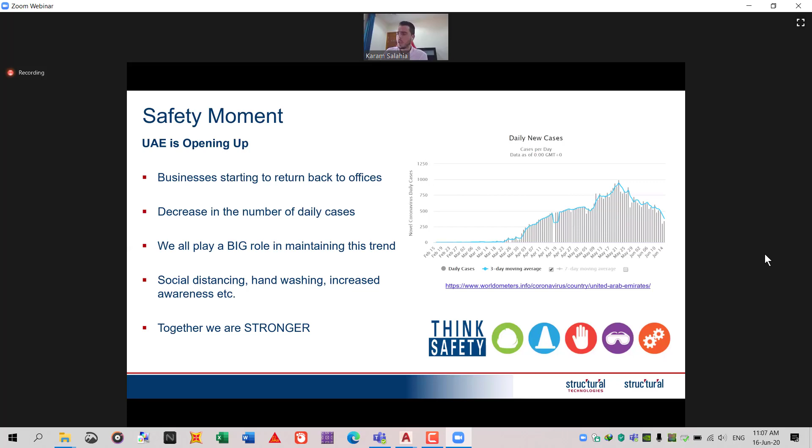So these are just a couple of points that we need to always be careful of when going back to work. Now, a quick introduction about today's speaker: today we have Mr. Bill.

Bill Hutton is a manager for Structural Technologies and a corrosion solutions team leader based in Dubai, in charge of the United Arab Emirates. Bill leads the durability-related repair works for reinforced concrete structures, including structural concrete repairs, post-tensioning repairs, water intrusion and moisture mitigation strategies, corrosion protection, and cathodic protection. As a solution builder for Structural Technologies, Bill delivers technology-driven turnkey solutions on an investigate, design, build basis to repair, restore, and extend the service life of structures. He is an active member of the Institute of Corrosion and the National Association of Corrosion Engineers, a certified cathodic protection specialist and technologist, and senior corrosion technologist, with 12 years of Middle East experience protecting and repairing concrete structures.

Bill, this is all yours, man. Thanks, Karam. Good morning, everyone, thank you for being here with us today, I appreciate everyone's time. I wanted to start off with a quick introduction for those of you who may not be familiar with Structural Technologies.

Structural Technologies is a US company. We've been around for almost 50 years, and we've been in the Middle East for about 12 years. Our annual revenue is more than $600 million US dollars per year, repairing, strengthening, and protecting existing reinforced concrete structures, which positions us as one of the largest specialist repair contractors in the world.

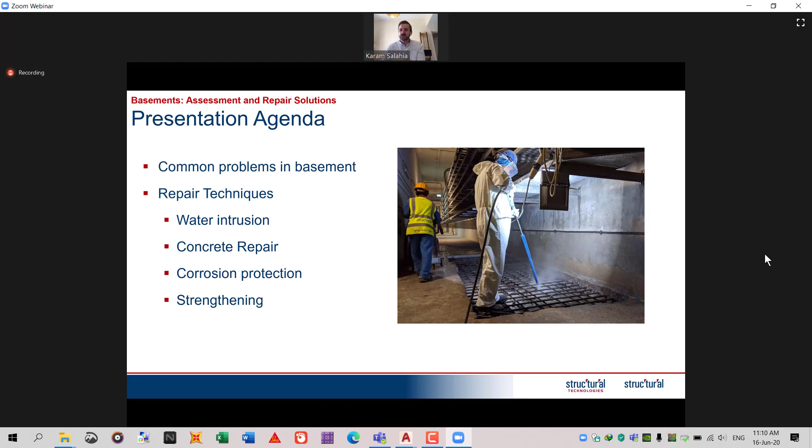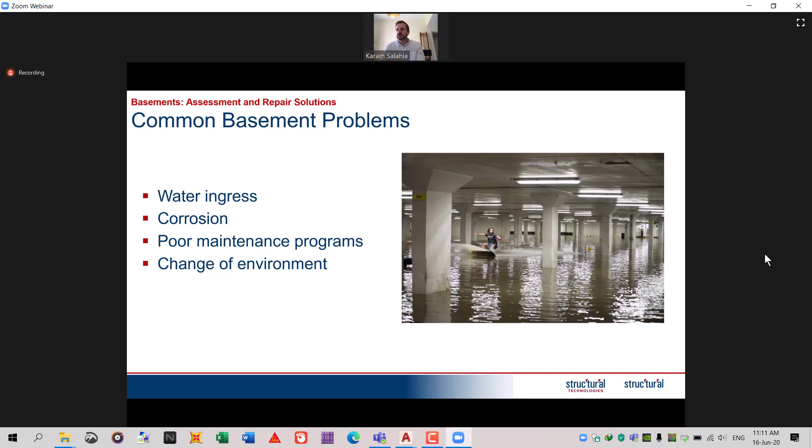So we start with common problems with basements. In my opinion, really, most of the problems we see with basements fall into these categories. They're either related to ingress of groundwater, related to corrosion of steel reinforcement, related to maybe poor implementation of maintenance programs, or related to some kind of change in environment or change in exposure condition.

So we're going to start by going into control of groundwater. I thought I'd just start off with some photographs so that everyone is familiar with what we're talking about. So, unfortunately, most of the basements here do actually leak. Water can come in through MEP openings, through cracks or construction joints, or through expansion joints.

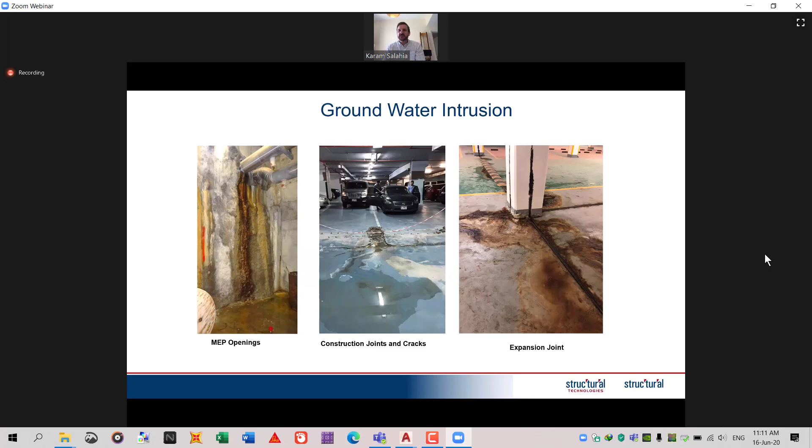Interesting fact is that concrete above 24 MPa is actually watertight. But that's except at the joints, the cracks, and the honeycombs. So it's generally at the defects. Wherever you have a defect or a concrete interface, a construction joint, that's where the water can come through.

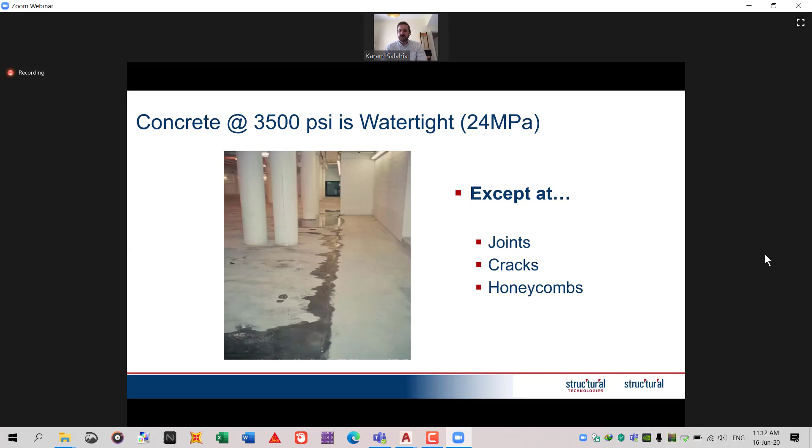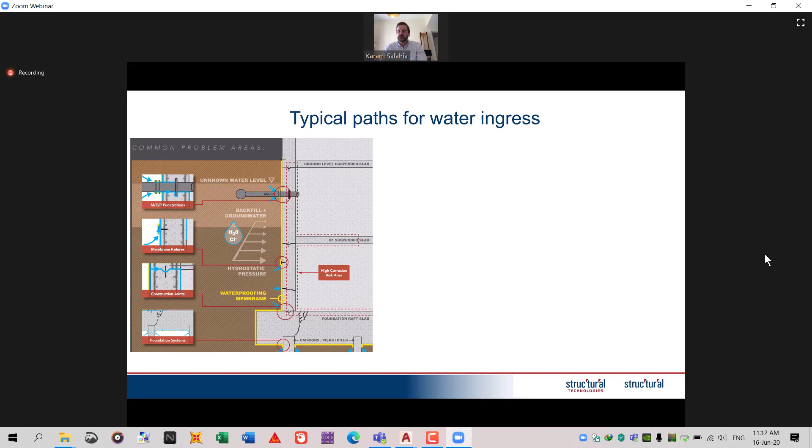So most buried structures, including basements, are constructed with a waterproofing membrane system. This could be a bonded or unbonded system, and the design intent of this system is to prevent water from coming into a building. However, in our experience, more than 70% of these membranes seem to fail in some way or another.

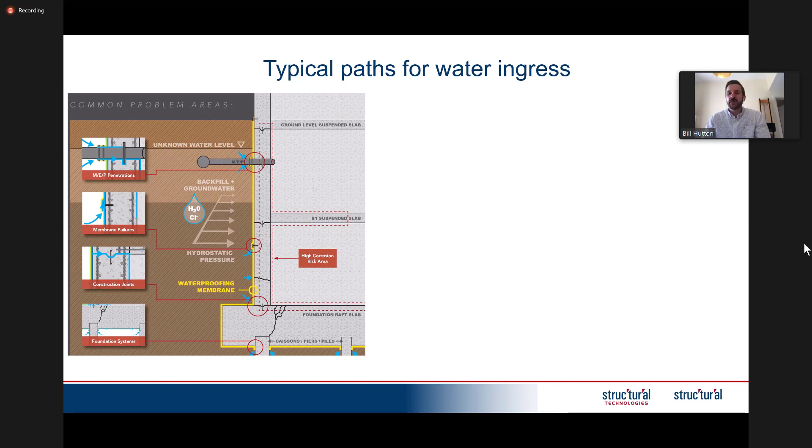And then once the membrane has failed, water is like electricity, and it will just take the path of least resistance into a building. So the pathways could be left-in-place form ties, could be construction joints, could be MEP openings, could be cracks, or could be porous avenues if you have poor quality concrete or honeycomb.

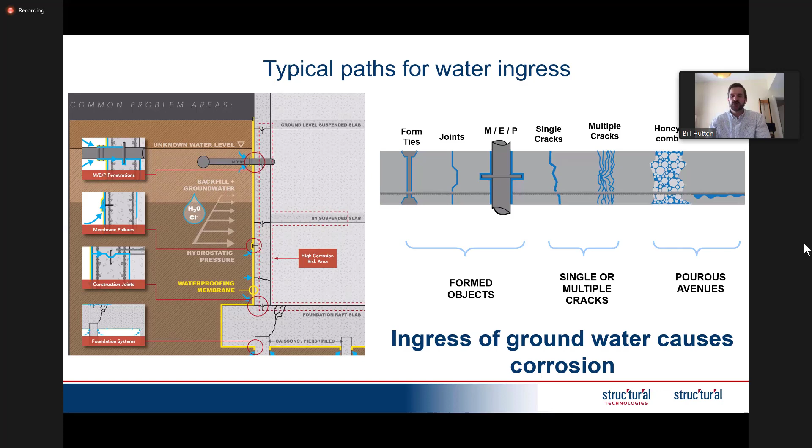As Morty discussed in detail yesterday, groundwater coming into a building is one problem, but really the bigger picture is that this groundwater contains salt, which causes the steel to corrode. I'm not going to go detailed into the mechanisms because that was discussed yesterday, but once the chlorides get into the concrete, they cause the steel to corrode.

Corrosion product is very expansive, so it means it can occupy 10 times more space than the steel. It grows on the steel, puts pressure on the cover, and can damage the concrete, which can end up resulting in a loss of strength for the structure.

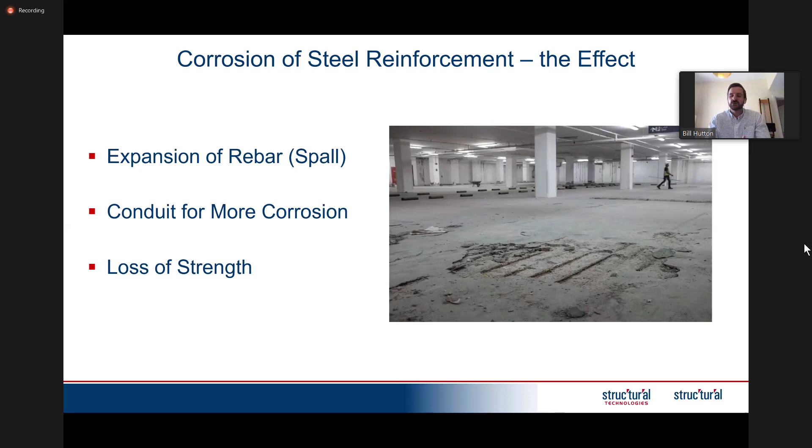So examples of groundwater control solutions include interior coatings, or coatings in general. Generally, if you're talking about basements, the water's coming in from outside. So if you install a protective coating on the inside, which would be the negative side, it's probably not going to be an effective means of water control. However, if you have, for example, a water tank in a basement where the water is inside the tank, if you put a coating on inside the tank where it's on the positive side, then it can be a good method of controlling or making a structure watertight.

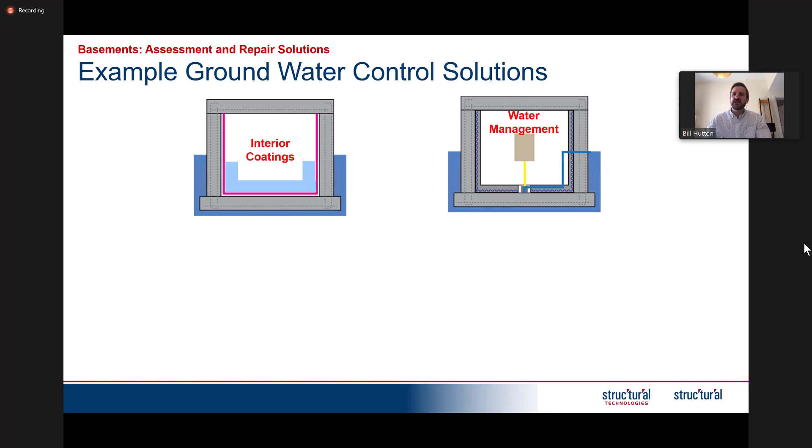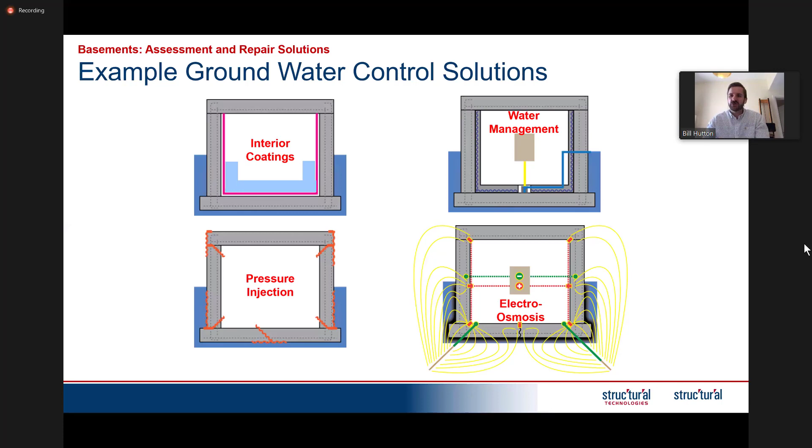We also have water management systems, where water is allowed to come into a structure, but it's collected, managed, and routed to a sump, then pumped out of the structure. We have pressure injection, which is extensively used as a means of groundwater control. And then we have something called electroosmotic pulse, a technology which uses electroosmosis, the movement of water in the direction of negative charge.

So we'll start off by having a brief discussion on pressure injection. We're going to talk about two basic concepts today, or means of doing pressure injection. The first would be what we call backside or curtain grouting. So what we're doing here is we're actually drilling completely through, or almost completely through the member. If it's a wall, we're drilling almost to the back of the wall until we leave about 10 millimeters of concrete. We would then put a steel bar or steel rod down into that hole.

We would tap it, we would fracture the concrete, and you would actually pump injection material.

You pump injection material behind the structure. So the first area that you might try to inject this material is between the cavity, between the back wall and the existing waterproofing membrane. This is really the closest you get to ever trying to reinstate the waterproofing membrane.

However, sometimes also in this method, when we're doing curtain grouting, if there's extensive rupture in the membrane, or if there's no membrane present, then actually we're not trying to inject in the space or cavity between the membrane and the structure. We're actually just doing grouting into the soil, creating a cloud in the soil behind the wall, behind the construction joint, or under the slab. You can see a photograph of this in action below.

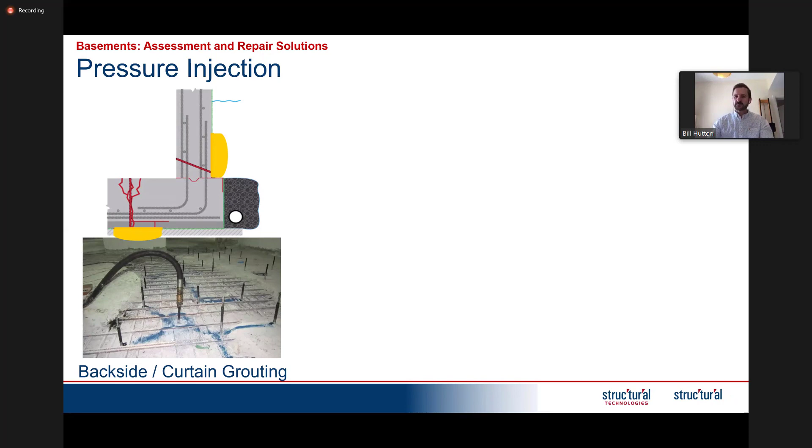Another common method of pressure injection or chemical grouting is something called interception grouting. This is where, if you take one of the most common areas where a basement would leak, it's the construction joint between the slab and the vertical member - that's a better example, so we call that the kicker joint. That's a really common place where water can come through. What we do is we drill in at a 45 degree angle to try and intercept the midpoint of the joint, and then we would inject the material inside to completely seal the joint.

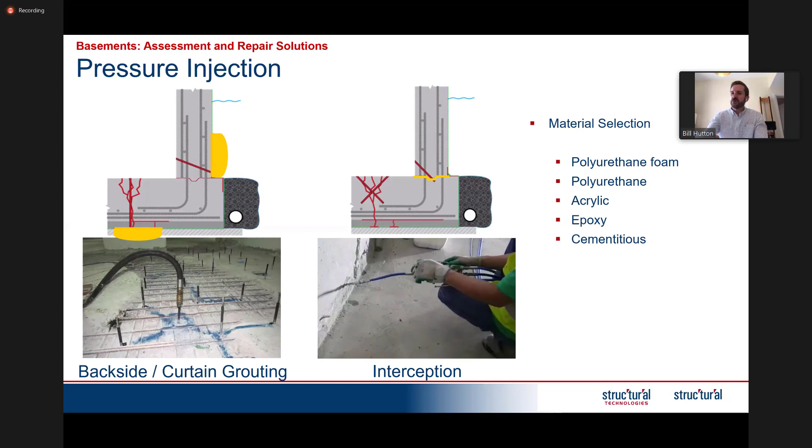Now, there's lots of different materials which can be used for pressure injection. What it's really important to do is ensure that you select the correct material for your application. So I've just listed out some typical materials which could be used: it could be a polyurethane foam, polyurethane, acrylic, or epoxy, or cementitious.

But really, it's important to select this material based on the exposure conditions - whether you have a wet or dry exposure, and what is the root cause. For example, if the crack is due to movement in the wall and you inject a rigid material, for example an epoxy, then you're preventing that movement which is required, so you would probably induce another crack next to the one that you just sealed. So in most cases, if you have through and through cracks in walls, you would be injecting an elastomeric sealant which has some kind of flexibility.

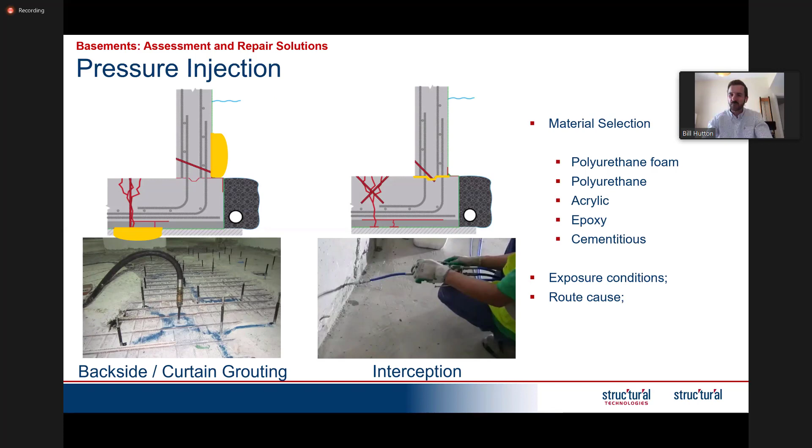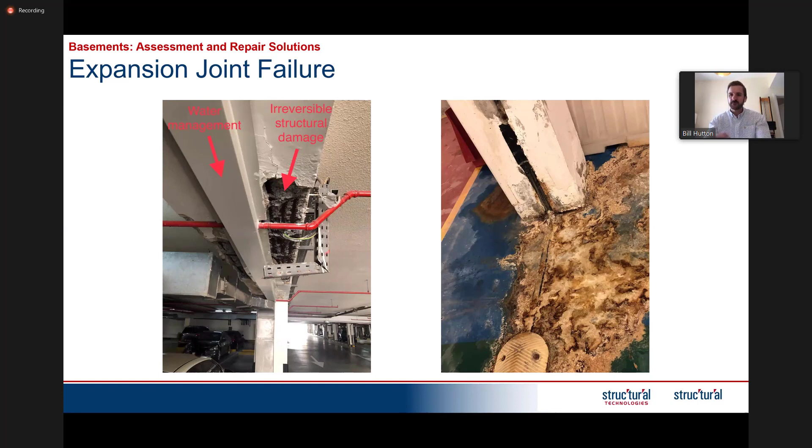So in terms of repair solutions for expansion joints, it's really important to make sure all of the effort needs to be done up front in terms of engineering.

In terms of engineering, we look at different exposure conditions. Is it a wet exposure or dry exposure? If it's exposed to groundwater, then retrofitting or repairing a leaking expansion joint becomes infinitely more complex, and especially the further down you go, the groundwater or hydrostatic pressure increases, so it becomes more complicated.

You need to look at what traffic will be going over the joint. Will it be foot traffic? Is it car? Is it heavy vehicles? And of course, design life and warranty also play a big part, as well as access.

By access, we mean, for example, if you take the previous example where you have the ground floor slab and the landscaping above, you have two options: repair it from the bottom or repair it from the top. The best way would be to repair it at the source, meaning you remove all the landscaping, remove the tiles, and get back down to the joint and repair it from the top. If for some reason that's not possible and you have to repair it from the bottom, it's certainly possible, but it could end up being more complicated, and you may face some challenges along the way.

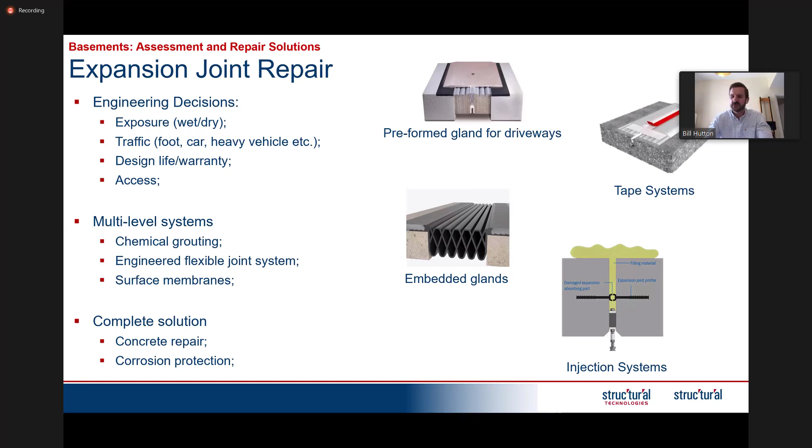So, water management. The idea is that water is actually allowed to come into a structure, it's collected and routed to either a drain, or to a sump where it could then be pumped out. So you're allowing water to come into a structure, but you're managing it.

Now, the risk in this region is that the groundwater, as we discussed yesterday, has an extremely high salt content. So wherever you are allowing this water to come in, if it's in contact with the concrete, it could lead to a durability related problem. You should carefully consider whether water management is required or not, and if it is required and you're looking for a long-term solution, you may need to include some corrosion control as well, such as cathodic protection.

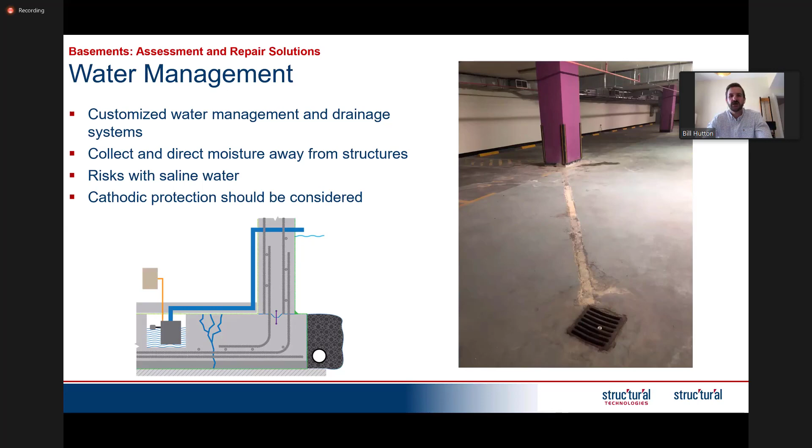Now we'll go on to concrete repair. So what are we talking about? This is basically where the steel has started to corrode, rust forms on the steel, it's expansive, and causes the concrete to spall and pop off. So it could be repair of spalling concrete on a wall, repair of a cracked beam, or repair of a concrete slab.

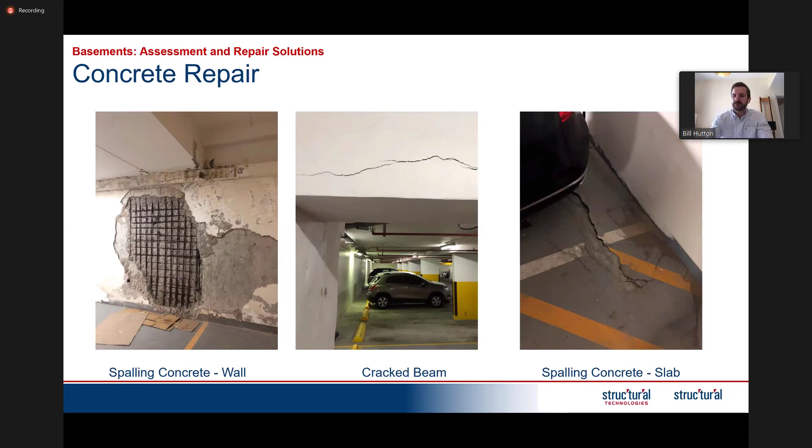I was thinking, from an owner's perspective, what would be my objectives for a concrete repair? These are five points I decided would be important. First is ensuring the safety of the structure, along with ensuring the safety of the traveling public.

A lot of these basements are used by people who park their cars, so there's vehicular traffic and foot traffic. After people have parked their cars, or while walking from lift lobbies to their car, there's a risk that concrete could fall down and injure someone.

Also, we're looking to prevent further deterioration. This references the law of fives, which Morty discussed in yesterday's webinar: durability problems don't increase linearly, they increase exponentially in cost and complexity. So if your structure requires repair and you delay those repairs, there's an exponential increase in cost and complexity.

All owners want durable repairs and want to ensure they get the best value. For every single dirham you invest in repairing your building, you want to make sure that dirham is well spent. One of the objectives is to prevent a requirement to repair the repair.

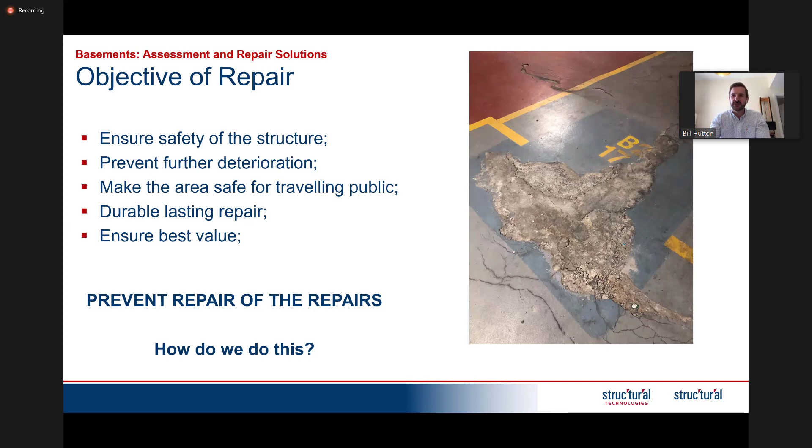First would be determining a suitable repair geometry. If you have delaminations as shown on the left, and you actually sound those out with a hammer and follow the exact geometry of the delaminations, you may end up with a fairly complex shape like we see in the middle.

The challenge is that if you repair in that complex shape, you have a lot of re-entrant corners, and there's probably a slightly different thermal coefficient of expansion between the repair material and the native concrete. If they're expanding and contracting at slightly different rates, a complex shape makes you more likely to have cracks in your repair. Wherever you have cracks, the steel is exposed and your repair may fail. So it's better to go for a simple geometry with as little corners as possible.

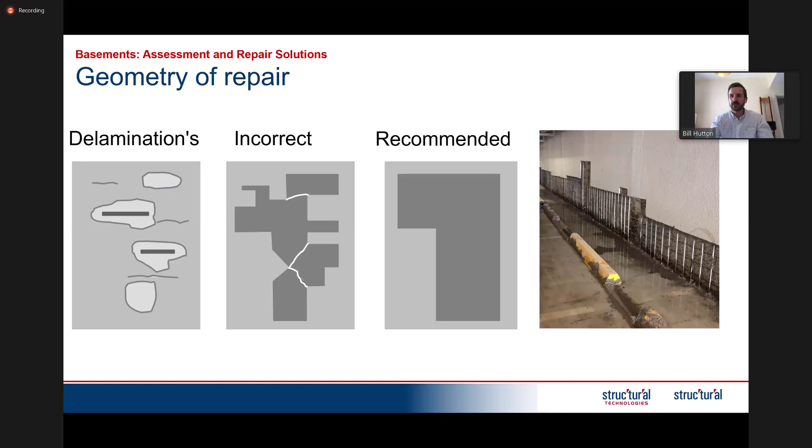Something else extremely important is to make sure that when you're removing or excavating the concrete, you don't only remove the concrete which is delaminated or spoiled, but extend that chipping until you reach a length of clean steel.

The reason is that if you only remove the loose concrete and leave steel in place which already has corrosion product on it - meaning the concrete's already contaminated - then around the outside of that repair, you're definitely going to see a premature failure.

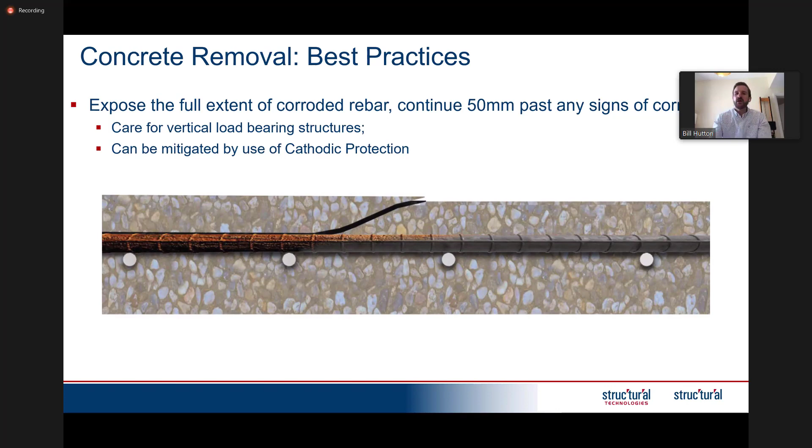Other basic steps required for concrete repair: make sure you remove or excavate concrete behind the steel. Typically 25 millimeters below the steel should be chipped out. Another simple way to put it is a gloved hand test.

If you have your correct personal protective equipment on, with a glove, you should be able to put your hand underneath the steel. The reason for that is two things: one, you make sure you remove all of the contaminated concrete around the steel - this steel is probably corroded because it's contaminated by carbonation or by chloride, so it's important to remove all that contamination.

It also enables you to remove any of the non-tightly bonded rust. This non-tightly bonded rust is typically removed by some means of abrasive blasting. Once the rust is removed, you can then take a caliper.

You can measure the cross-section loss. Typically, the rule of thumb is if you have cross-section loss of between 10 to 20%, then you should engage a design professional, an engineer, and they will determine how much supplementary steel needs to be added.

The reason we say supplementary steel is because it's very rare that you would actually remove steel from a structure—you always just add additional steel. Whenever you're adding additional steel, it's important to get sufficient development length, which is the overlap between the new bar and the old bar. If there's not sufficient development length, you may need to drill in an epoxy anchor or some dowels to provide that development length.

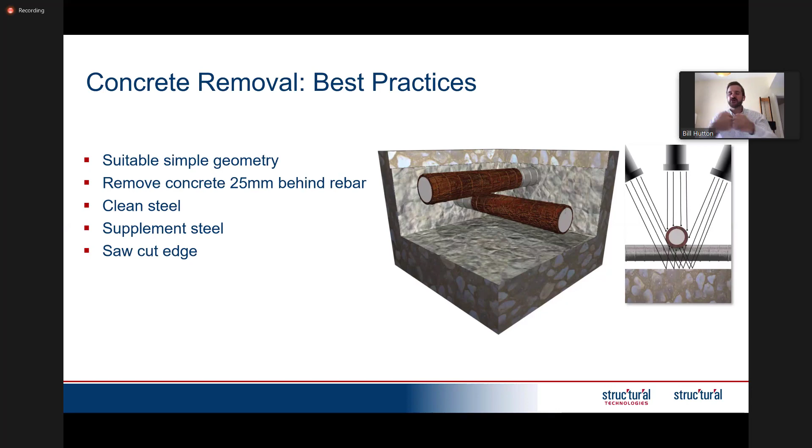In terms of surface profile, what we're looking for in a concrete repair is monolithic composite action. To get that, we need to make sure we have a roughened surface on the native concrete, so we would chip and provide typically a 6 to 8 millimeter amplitude. We also want to provide an open pore substrate.

As we said before, concrete is like a sponge—it has all these pores. We need to make sure those pores are open so that when the repair material comes in, it's accepted by the native concrete. Sometimes you also need to have vertical or horizontal dowels, if it's for a wall, to enable sufficient shear transfer.

QA/QC always plays a key part in all repairs, occurring along every step of the way. At the end of the repair, once it's finished, often a test which is done is called a pull-off test, where you're checking the bond strength between the repair material and the native concrete.

Here you would core down through the repair into the existing structure, then epoxy anchor a dolly on top, and pull that off. You want to check that the strength required to break the concrete is higher than the strength required by your design—as a rule of thumb, typically maybe 1.4 MPa.

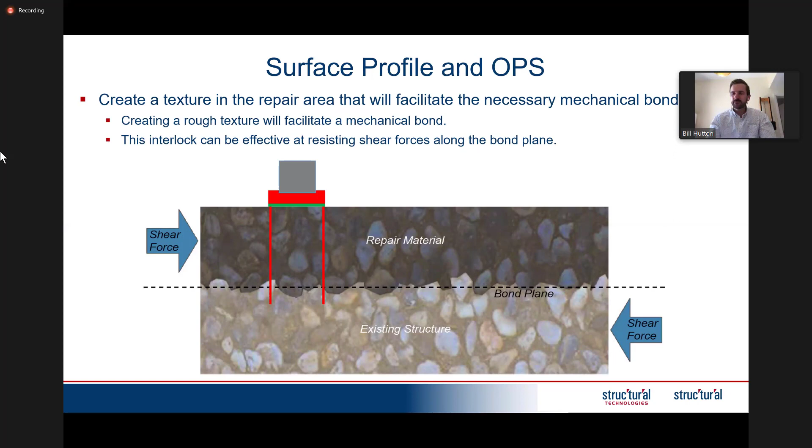It's also important to make sure you have correct means and methods for concrete placement. There are lots of different ways concrete can be placed, with advantages and disadvantages of each method. Some methods are, for example, dry hand pack, which is really only good for shallow or cosmetic repairs. If you have any steel exposed, it's very difficult to get correct compaction behind that steel.

If you have large overhead repairs or you're enlarging a member, then probably you need to use a technology such as form and pump, where the concrete is pumped in under pressure. It's all about QA/QC and making sure that whatever means and methods are being used to repair your structures are correct and selected based on the specific requirements of your structure.

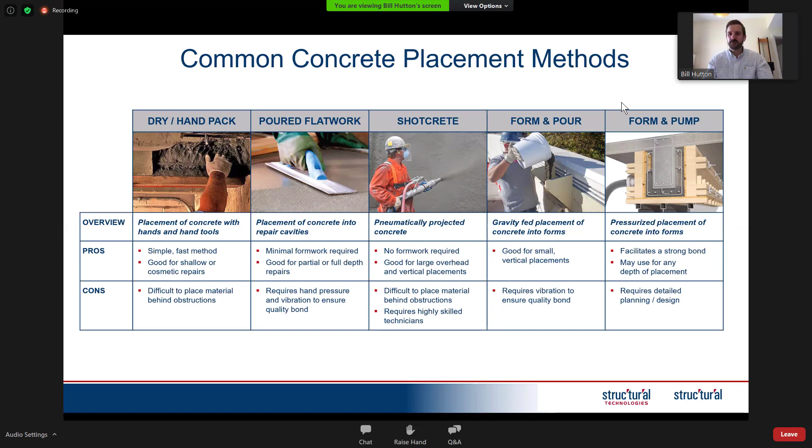Someone said this the other day, that there are three things in life which are guaranteed: the first is death, the second is taxes, and the third is that concrete will crack.

Unfortunately, yes, concrete will crack. If your concrete has cracked, then where that steel is passing through the crack, there is no protection. If the cracks are not repaired properly, what starts as a crack can quickly lead into a durability problem, which can then lead into even a structural failure of a particular part of a structure.

One very simple way of repairing cracks is what we call rout and seal. This is where you simply rout out the crack and seal it, which provides a barrier preventing water, chlorides, and carbon dioxide from carbonation getting to the steel.

It probably can't be used if you have a structural crack—in that case you need to do a proper structural repair. But a lot of these cracks are due to thermal expansion and contraction, so this method enables that movement to be there.

I would definitely advise owners that if you have cracks in your structure, you should get them assessed. A lot of the time you can get cracks repaired for a fairly nominal amount, but if you leave them unrepaired, it can lead to very expensive, complex, complicated repairs further down the line.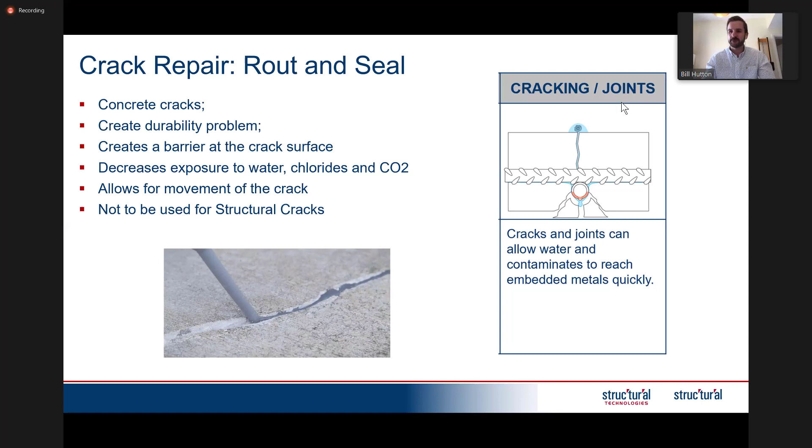We assume this concrete repair was required because the concrete became contaminated with chlorides or carbon dioxide, causing carbonation. So we removed all of the damaged concrete, cleaned the steel, added steel, cast it back, and did a pull-off test - everything's okay. This steel is now good for, say, 10 years. In the area you've repaired, you should face no problems.

However, the reason it corroded in the first place, the reason the concrete spalled, was because the steel corroded, and the reason the steel corroded is because the concrete was contaminated with either chlorides or carbonation. So if you leave those chlorides or carbonated concrete in place around the outside of the patch, you can end up with failure around the perimeter of the patch.

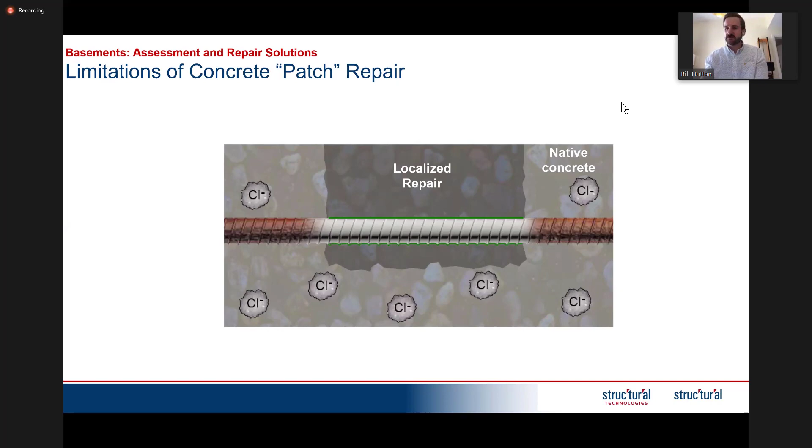So for some owners, due to access constraints or budget constraints, they can only do patch repairs. They understand that every 2 to 5 years they're going to have to come in and do these repairs, which means additional disruption, and it would increase the overall service life cost of your buildings.

So some owners want to explore durable long-term solutions. We work with a lot of owners to provide long-term corrosion control solutions. These are generally selected based on the service life required and whether there are any access constraints.

For example, if you have paid parking that's always full, it's sometimes very challenging to shut down the parking for a long period of time. Also, there are sometimes constructability or budget challenges.

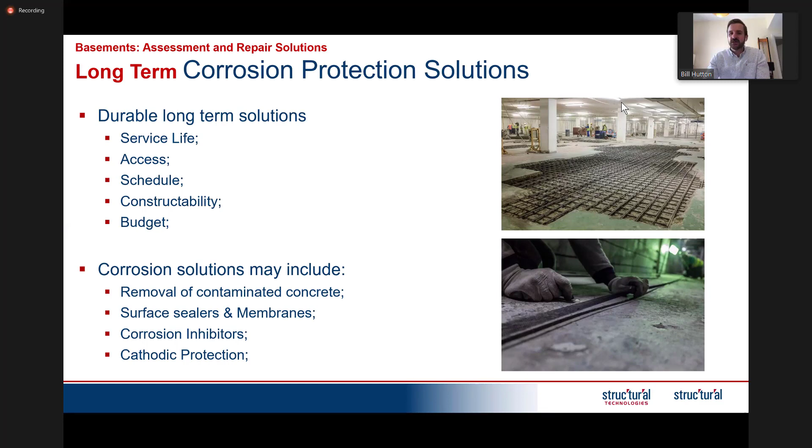So if you're looking for long-term solutions, they can include, for example, removal of contaminated concrete, surface sealers and membranes, or corrosion inhibitors or cathodic protection. We're going to go through a couple of these technologies now, or repair solutions.

First is removal and replacement of contaminated concrete. Yes, it's definitely a long-term solution. It normally involves fairly extensive investigation - you need to do lots of testing to determine which areas of your structure are contaminated and to what depth, and then you'd need to chip out all of that contaminated concrete and place it back with fresh concrete.

As you can imagine, it's a fairly intrusive repair, which can end up being fairly costly and take a lot of time.

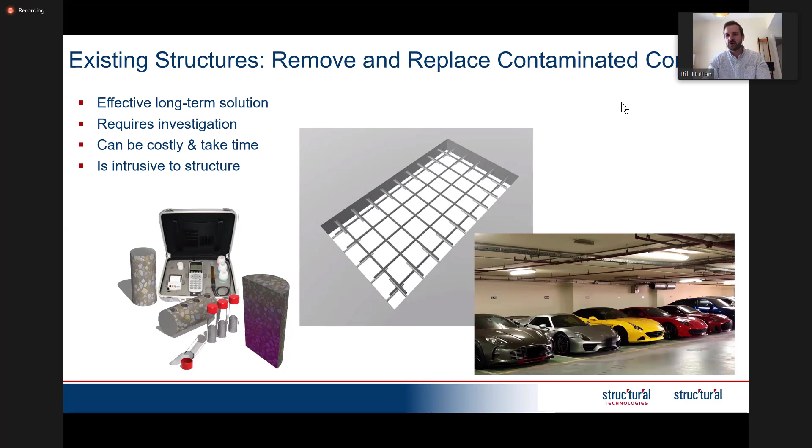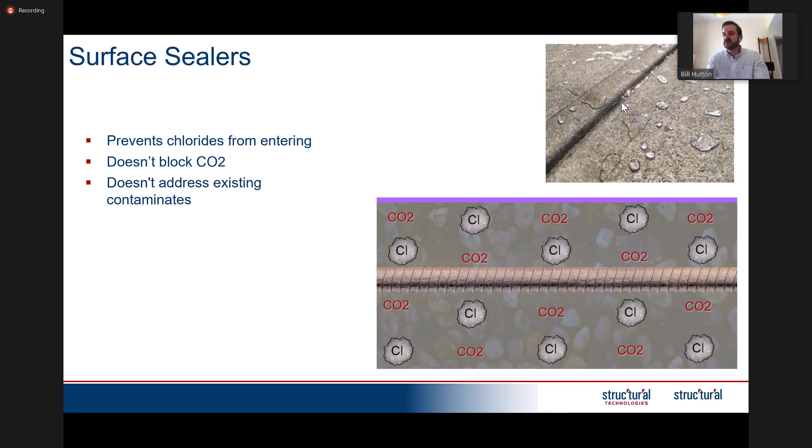Another solution could be surface sealers. Surface sealers will generally stop more chlorides from getting into the structure. They probably won't block oxygen or carbon dioxide, and they definitely don't address existing contaminants. This means the steel, if already contaminated, will definitely continue to corrode.

A better solution for corrosion control can be high-performance membranes. If you have a high-performance membrane on your structure, it can prevent chlorides and carbonation from getting in, and it can prevent water from getting in, but it doesn't address existing contaminants.

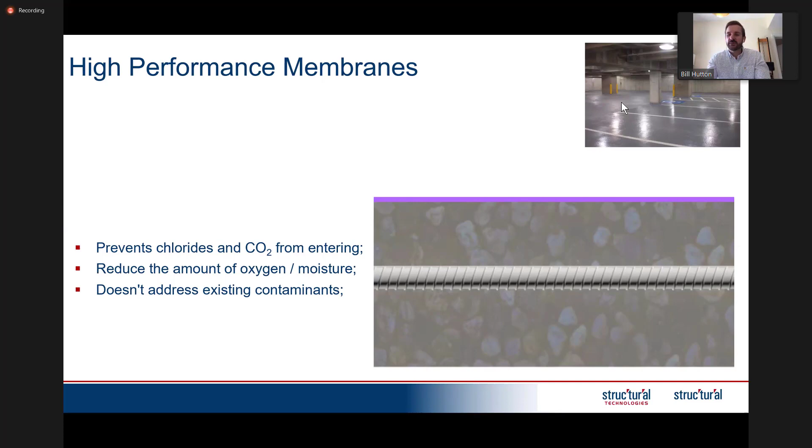This is where it's really important to maintain coating. A lot of the buildings we work on in Dubai are actually less than 10 years old, and we go into them and see the car park coatings have deteriorated. If you have a new structure, it's always good to maintain these protective coatings to prevent that contamination from occurring, because once contamination occurs, it's very challenging to address.

So even if you put a high-performance membrane on it, it can do two things. For an elevated slab, it will prevent oxygen from getting in, which slows down corrosion. If you have a slab on grade, the membrane will actually prevent moisture from evaporating, meaning the slab becomes more saturated, which again reduces the availability of oxygen and reduces the rate of corrosion.

So membranes can be used to extend things, to kick the can down the road, if you like. They can be used as short-term solutions to reduce corrosion, but not necessarily to mitigate corrosion.

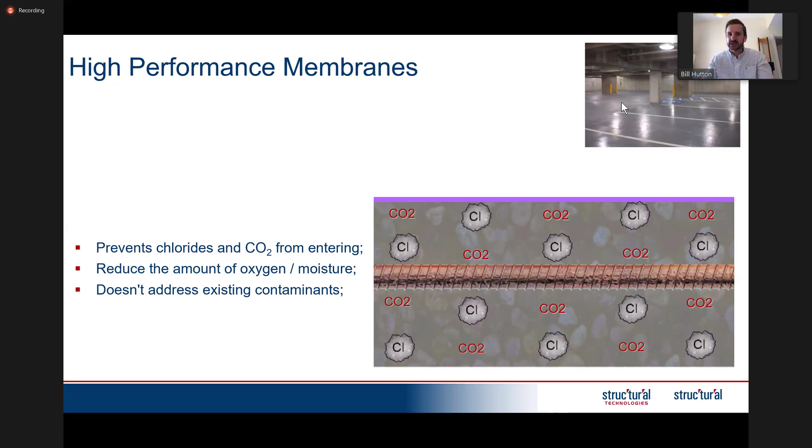So a technique which can be used to mitigate corrosion is something called cathodic protection. Cathodic protection is an electrochemical technique used for corrosion control. In simple terms, corrosion is the process of energy being released from the steel, and cathodic protection is a process of putting energy back into the steel.

There are two main types of cathodic protection systems. The first is a galvanic system. The main feature is that they do not require a constant source of power - they use the natural potential difference between the anode and the cathode. The anode may be zinc, the cathode is the steel we're trying to protect. We use that natural potential difference to provide the protective current. For an impressed current cathodic protection system, we require an external power supply.

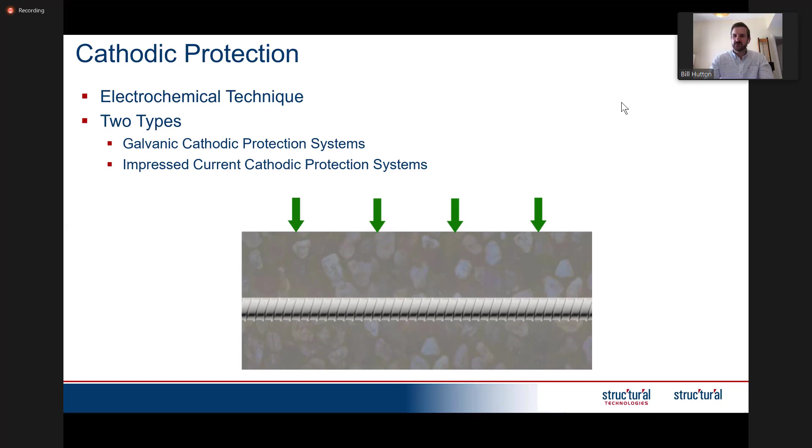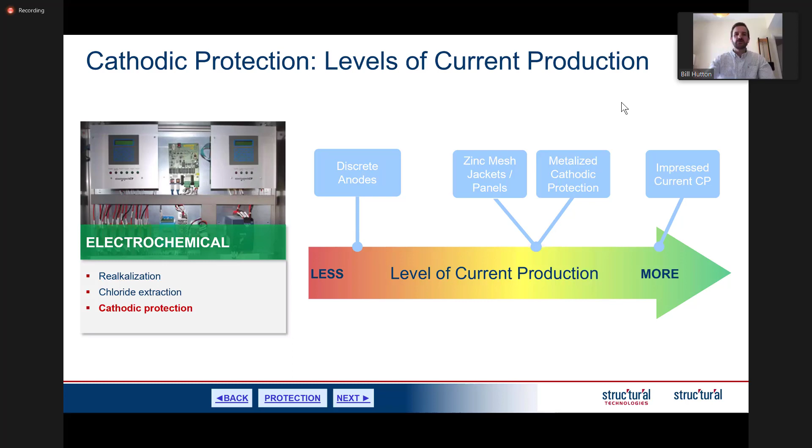I'm going to show you a couple of different examples of cathodic protection systems. There are lots of different systems available, and they're generally selected based on the geometry. What is the area of the structure you want to protect? Is it used as a driveway? Are you protecting isolated columns? Are you protecting just some high-risk areas near expansion joints? Or do you need blanket protection for your entire basement? The range goes all the way from discrete galvanic anodes up to state-of-the-art impressed current cathodic protection systems.

A system which I really like - we've installed a lot of these across the UAE recently - is called the EZ Anode zinc panel system. In simple terms, if you look at the diagram, we surface prep the concrete and make a breakout so we can make a connection to the steel. The zinc mesh is attached to the concrete member, then it's encapsulated in proprietary geopolymer. A connecting wire is made between the zinc mesh and the reinforcement, enabling the protective current to flow from the zinc through the electrolyte, which is the concrete, to the steel, causing a reaction at the steel which provides protection.

This type of system typically provides 15 to 20 years of protection. One of the big advantages is that it's very good for protecting discrete elements, and there is very limited operation and maintenance - it's like an automatic self-regulating type system.

Somewhere we install a lot is for expansion joints. For example, if you have a retaining wall in a basement with expansion joints, typically if those expansion joints have been leaking, between 3 to 5 meters either side of the expansion joint there will be a high risk of corrosion - those are the areas which require protection. This kind of reiterates what was talked about yesterday by Morty, about really providing optimized solutions. So if your basement wall is not 100% at risk of corrosion and you only have a risk near the expansion joints, you only need to invest money in protecting near the expansion joints - that's where this system can provide good benefits.

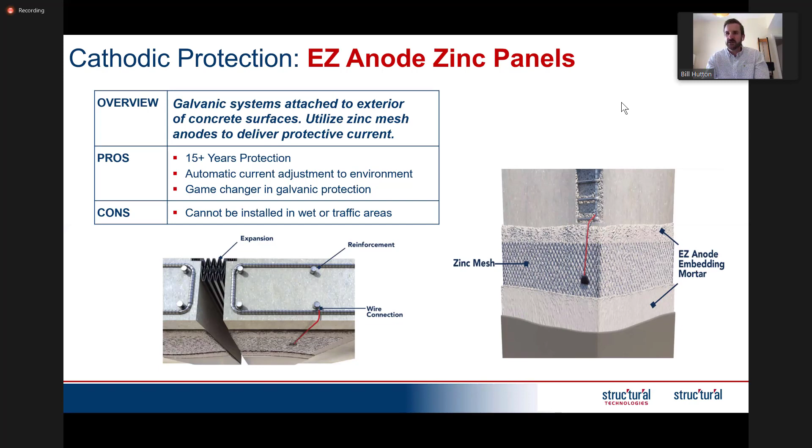Another system, which is also galvanic so there's no power supply, typically lasts up to around 15 years - this is called metallizing. Metallizing is where molten zinc is sprayed using compressed air onto the surface of the wall. We'd start the installation by installing a metal plate onto the wall which is connected to the steel - that becomes your negative connection. You would then shot blast the wall, and it's sprayed with probably up to about 200 microns of zinc, which can then be covered with an acrylic aesthetic paint if required. This system is really nice because it provides a good length of protection, about 15 years, and very, very little operation and maintenance.

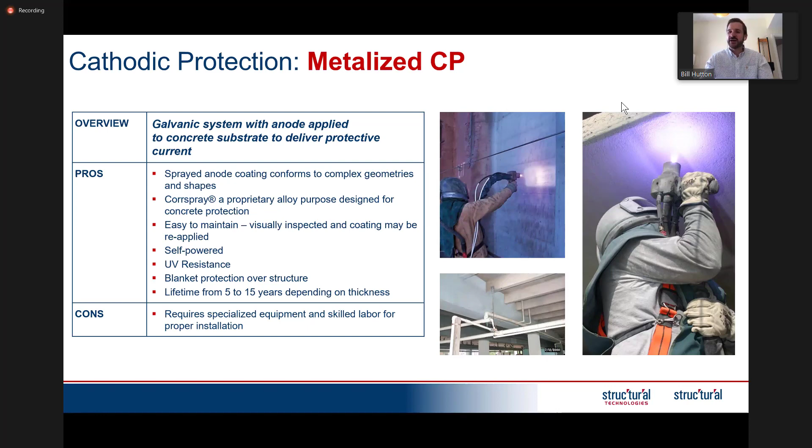Other systems which can be installed are impressed current systems. There are lots of different anodes out there. One of the most common types would be a mixed metal oxide coated titanium, which could be installed as a ribbon mesh in saw cuts or slot cut into concrete cover, or as discrete anodes installed in drilled holes, or as an expanded mesh, looking a bit like chicken wire, installed across the entire surface and encapsulated in a cementitious overlay. Generally, if you're looking to protect large areas, especially horizontal slabs or driveways, ICCP is a very economical way to provide up to 50 years of corrosion control.

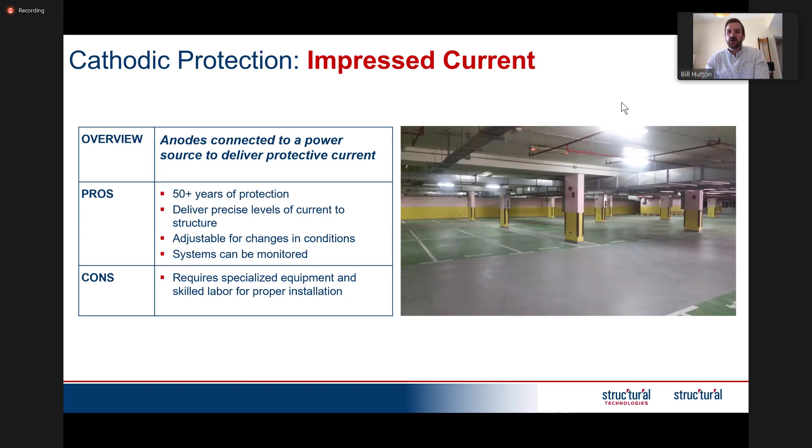So this last section is going to look at strengthening. We're going to particularly focus on one area of strengthening, and that's the requirement to strengthen slabs which have failed as a result of hydrostatic pressure.

Typically, basement B1 to B4 basements are common across the UAE. We've seen the deepest one maybe has 6 or even 7 levels, but basement 1 to basement 4 is extremely common. Everyone probably knows the groundwater table here is very high, so if you excavate the soil around the building, probably 1.5 meters, you would reach the water table, which means you have very large hydrostatic pressure, ranging from 10 to 160 kPa.

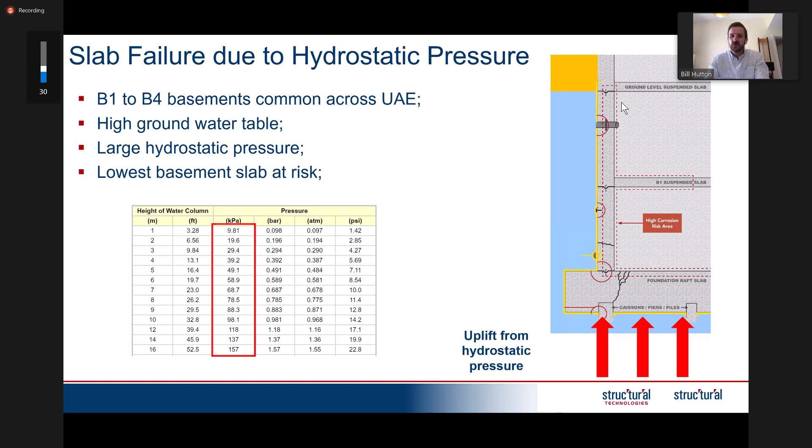So this represents a diagram where you can see the slab and pile caps. This would represent the lowest level of a basement. This huge hydrostatic pressure can cause the slab to bend, which can result in flexural failure or shear failure between the connection of the raft and the pile cap, causing a lot of excessive cracking, which can result in durability related problems, and ultimately failure of the raft.

Often where you have uplift problems, you also have huge problems with groundwater ingress. So once the slab bends and damages the membrane, you bring in all these cracks into the structure, making it perfect for groundwater to come up into your structure.

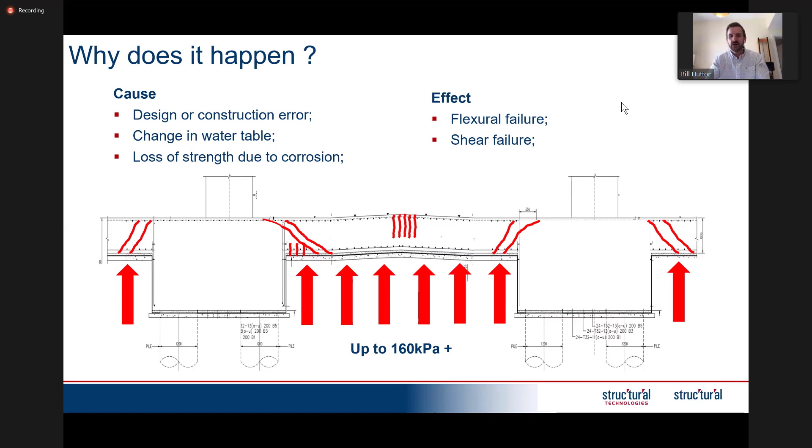Sometimes you can see the bulging of the slabs with the naked eye. Sometimes if you just have a gut feel it might be there, then you would need to engage a qualified professional, who may come in and do a level survey, and then you would get a clear understanding of where you have this undulation.

You may see excessive cracking in the slab, and you may see delamination where there's no corrosion. Probably anything other than water seepage around columns would only be identified by a licensed design professional. So you bring in maybe you think you have a problem, and then you bring in an expert, and they will determine whether you have an uplift problem or not.

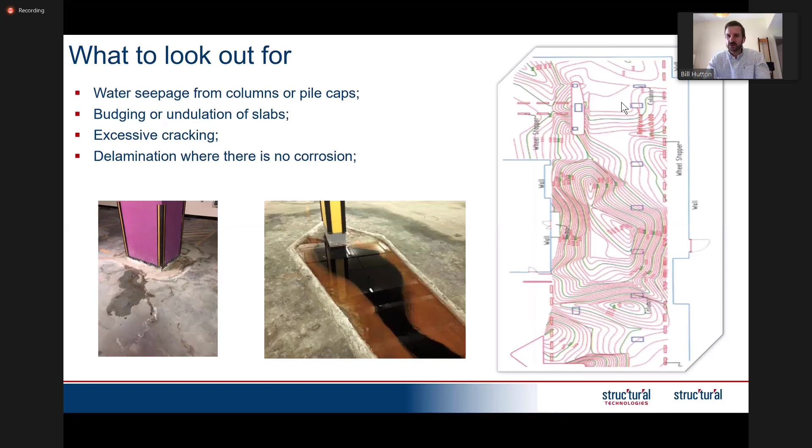One of the biggest challenges with this type of repair is actually consideration to the headroom. Often there are MEPs, ventilation systems, firefighting systems installed on the soffits, so you need to make sure that you still adhere to the municipality requirements in terms of headroom.

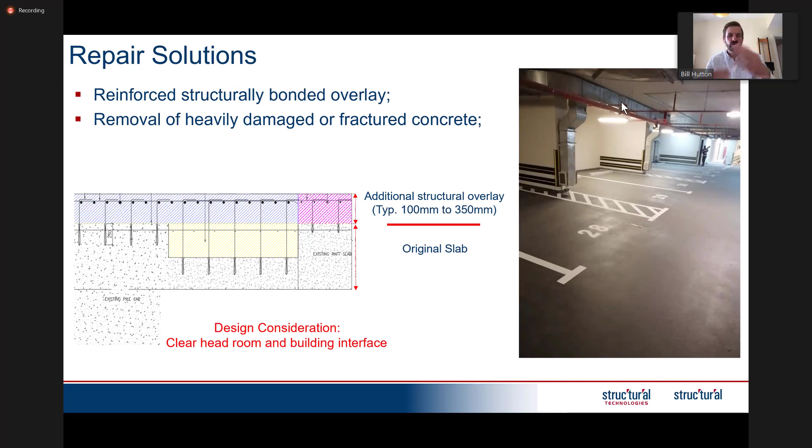So steps for this repair, this is very simplified, but you require the correct surface profile on the existing structure or the native concrete, so that's generally CSP 6, you just need a 6 millimeter amplitude. You would then install the new steel reinforcement because it's a reinforced bonded overlay, and you would need to install dowels to make sure you have correct shear transfer.

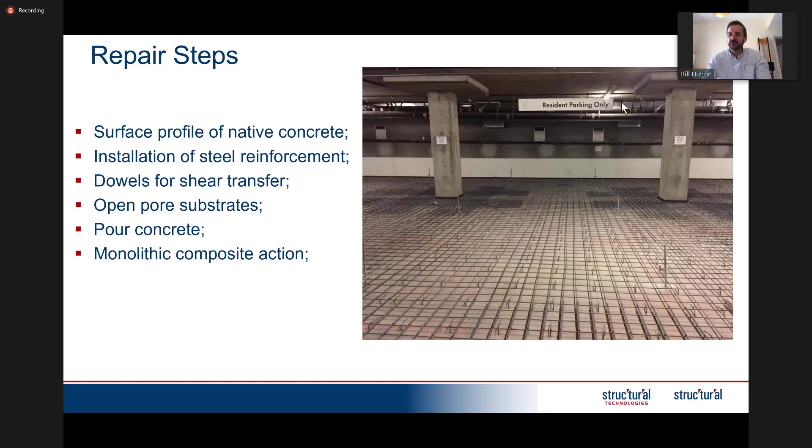And then, like we discussed before, about having an open pore substrate, you need to make sure the existing structure is super clean, all the pores are open, so that once you pour the concrete, you can get this monolithic composite action. So you would probably vibrate the concrete to make sure you get the repair material into the pores of the existing structure.

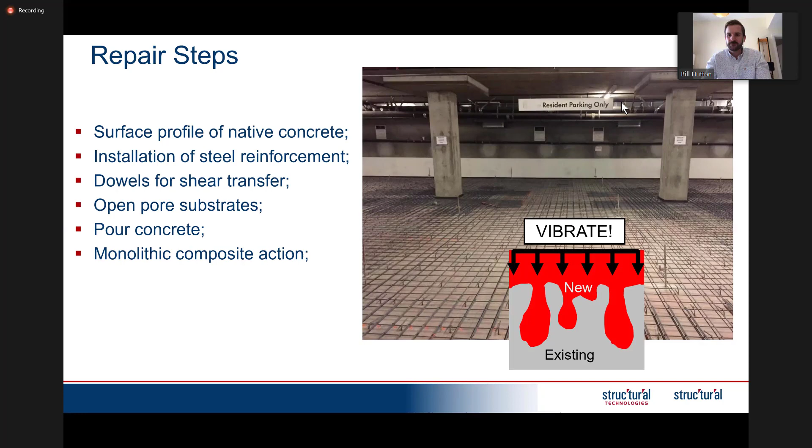So this concludes the seminar today. Hopefully it's been interesting. Like we said at the start, it covers 4 fairly extensive, detailed subjects. So we welcome you to contact us afterwards if you require any further information.

To summarize what we discussed, the repair process should be followed, starting with investigation. When it comes to engineering, there are always lots of different solutions available, so it's important that your engineer is discussing with you as an owner to ensure your objectives are fulfilled. Then the last part is construction, and to have durable, long-lasting repairs, you need to engage a specialist repair contractor, with importance placed on QA/QC and use of qualified experts to avoid early failure of repairs.

We're talking about best value here, so every dirham is extremely important. Whatever you're investing into your building as an owner, you deserve the best value for that. So how do you get best value? That's making sure you have correct QA/QC and ensuring you have qualified experts repairing your structure.

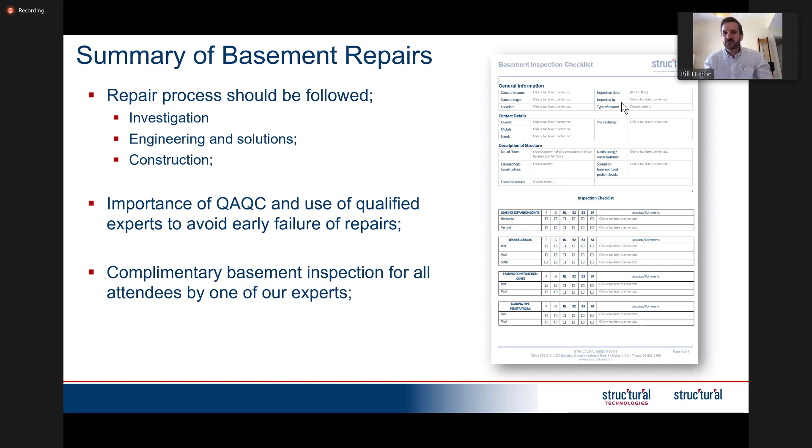Thank you very much for your time. I'll hand back to Karam, and I think we're going to do some questions next.